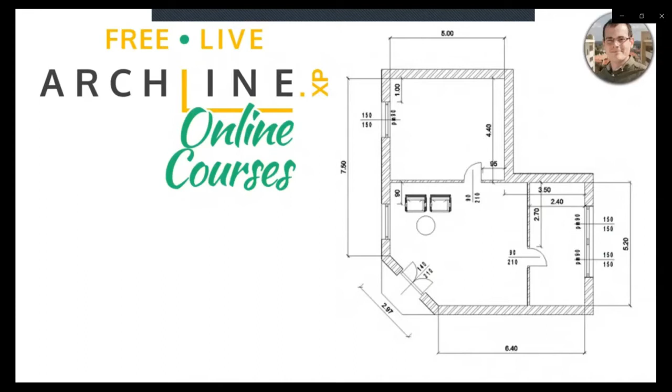Obviously, first we are going to look at the baby steps: how do we get started? I don't want to bore you with details, so we are going to build up a family house's reception room. Then we look at the basics, how to draw lines, how to make measurements. And then we look at bathroom design, tiling, quantity takeoffs, and how to use bathroom appliances.

Then comes kitchen design, which is all about making furniture pieces, paneled furniture, and also using home and kitchen appliances. Then comes quantity takeoffs, schedules, and tags, because that session is all about documentation. Eventually, we look at lighting and light sources. What makes a good rendering? What makes a good lamp? And lastly, we look at visual design and rendering, which will show you how to make good rendered images.

But everything starts in the beginning, and that's what we have today. So today we get started with a very simple living room design.

Before we get anything underway, let's talk about the software we are going to use for this course. The software is called ARCHLINE.XP, which is a family of products targeted for any kind of design work, whether architectural models or other building elements. This is the software you could be using, and it's a CAD software.

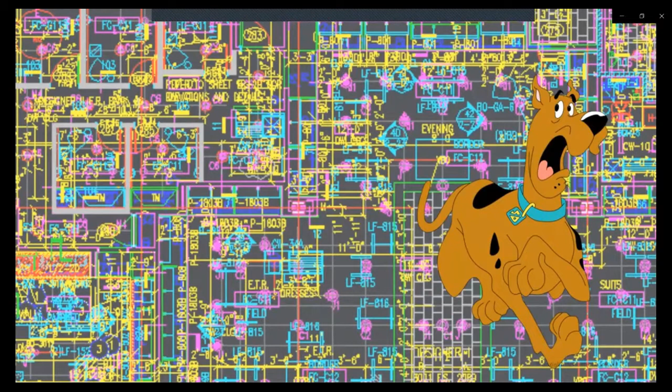Now, I always make this disclaimer because when people hear CAD software, they might react a certain way—which was actually my own approach. I was very bad with mathematics and geometry back in school, so whenever I see a CAD software with a bunch of lines, text, annotations, and command lines, I always run scared like Scooby-Doo in that famous cartoon series. Well, we are not going to look at that. We are not going to show you what's under the hood. Instead, we are going to be what I like to call creation and modeling oriented.

Think about modeling as when you are creating a clay pot or making something with your hands. You get your hands dirty for sure, but you enjoy what you do. So instead of trying to understand what makes a line or how you draw a simple group or two-dimensional polygons, we are going to look at modeling. We are not going to bore ourselves with that—instead, we'll look at how to create things.

That being said, let's get started.

If you go to our website, www.archlinexp.com, and then to the webinar series website—I'll share my screen to show you what we have here—you can see the courses planned for the next couple of days. Here you can download the webinar files and course guides. My ARCHLINE version just opened, so you can download the files and course guide from our website as well, so you can follow along with our courses.

Now let's get back to the software itself. This is what we are actually going to cover: a very simple yet effective, and I think rather nice, living room design. This is not my design per se—it was made by one of our clients, and I'm very grateful for the project she sent us.

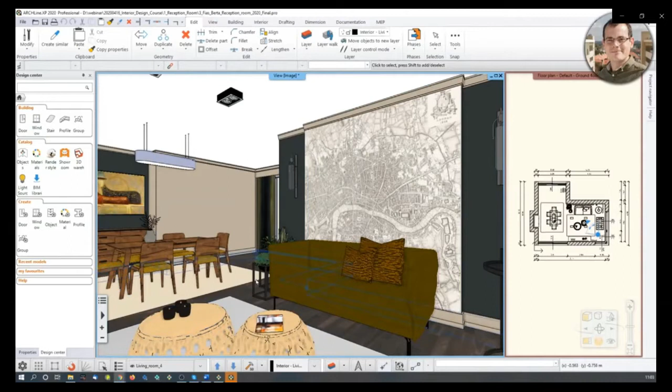What we are going to do is discuss how to make this very simple room with the furnishing pieces shown. If you have any questions, ask them along the way, and at the end I'll do my best to answer them.

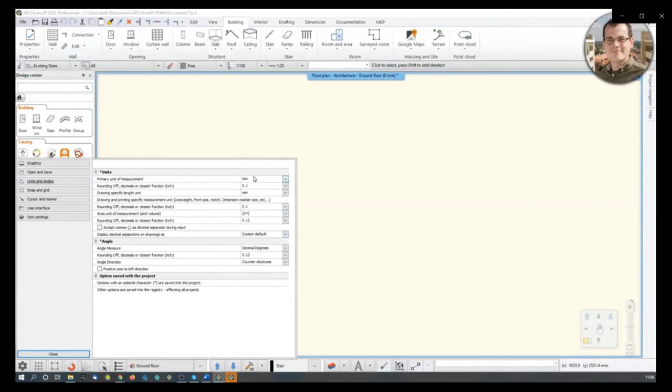So let's go back to the walls, right click, properties, and here I can define how high my walls should be and how thick they should be. And for now, I'm fine with that. So let's just hit OK.

We are working with a predefined room shape. I'm not going to sketch the room because that might be a little bit time consuming. So instead, I'm just going to pick a room shape, and I can do that with the Interior Room Maker Predefined Rooms menu. Right off the bat, I start with a rectangle, and all I have to do is type in the values.

Let's say I want to have a 7160 times 3900 millimeters room, then this is what I end up with. I'm just going to submit 7160, and 3900 is fine. Updates, hit close, and now I end up with a room.

Let's talk about navigation. There's a 2D and there's a 3D part. When you are in 2D, you can navigate by scrolling in to zoom in and scrolling out to zoom out. Pushing the scroll key and moving your mouse, you can pan around, and if you have moved quite far away, double click with the mouse scroll and the model will be fit back to screen.

If you want to work in 3D, which you can do anytime you want, you activate the 3D and activate this button right here, which magnifies the window which is in focus. Now zooming in zooms in with the scroll, zoom out with the scroll.

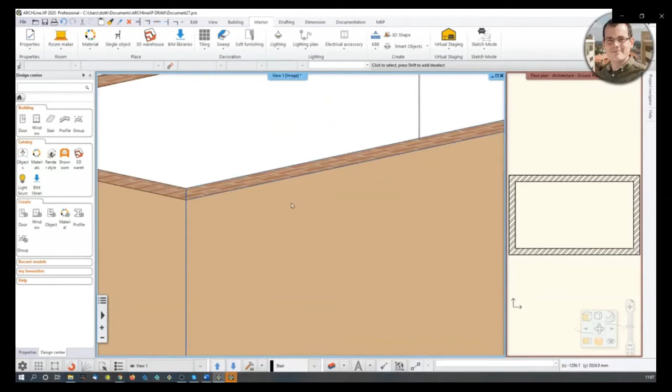If you want to rotate your model, you just push the right click on your mouse and move your mouse. If you want to orbit around your model, push the mouse wheel and the shift key, and then you can orbit like that. So this is basic navigation. If you want to pan, hold the scroll key and move your model.

Now let's go back to the 2D, activate it, because this is where we are going to do most of the work right now. There are two extra sort of extrusions from this model. There should be one bay here and another one there. So how do we create that quickly?

We go to the building, edit, and square add-on menu, and here I can add the two add-ons. There should be one here, another one there. The add-ons sizes are, I just have to look at the cheat sheet, the width, the A value should be 3000, and the B value, the depth, should be 2240.

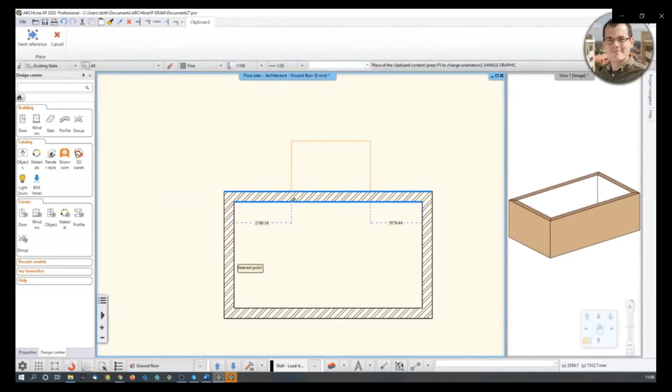By the way, if any of this is not understandable, let me know and I will explain further. So now I have a shape which I can add to my drawing, and I'm just going to snap this green dot to the edge, and there you go. So one add-on is done.

Okay, I want to add another add-on, but I don't want to go back to the menu over here and find the right tool. Instead, I'm just going to use right click, and the software will offer the last command, which is a square add-on. This is what I'm pulling up, and the add-on sizes should be, again, I go to my trusty cheat sheet, it should be 1400 for width and 500 millimeters for depth.

How do I add it properly, positioning it from the wall corner? There's a tool for that—I push the add-on to the wall, see where it says nearest point, and then type in the value 1400, and that value gets submitted. So this 1400 comes from here.

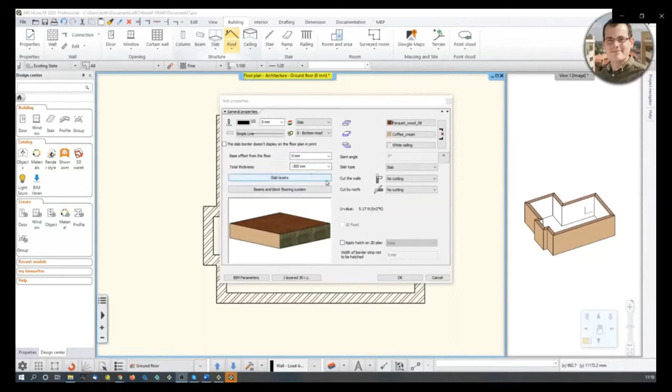I go to the building menu, slab, right click, and go to properties. This is where you define the properties of your slab. I'm fine with the covering, the thickness, and the base elevation—I'm not changing that, but if you want multi-layered or multicolored slabs, this is where you set them up. Let's just hit OK, I'm accepting this right now.

So I go to slab, slab by walls, highlight the whole drawing, hit enter, and the slab is created. You don't have to manually trace the drawing—just highlight the whole thing, hit enter, and it's created.

Same story with the ceiling. Let's investigate how that's done. I go to ceiling and plain auto ceiling, right click, properties again. I always like to fine-tune things before I use them, so I don't have to go back and edit them later—I like to do that before getting started.

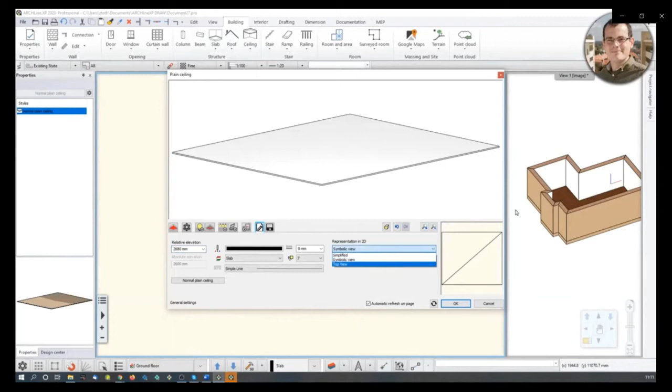Two things I have to set up are the elevation of the ceiling, which is going to be 2680 millimeters, and the representation in 2D—I don't want this slash, so I'm going with top view, and I think this is done.

Okay, the ceiling is fine-tuned, so all I have to do is go with ceiling and plain auto ceiling, and again this spider web appears, which recognizes the contour of the room. If I click, the ceiling is created.

This is a dilemma for me, because I want to model things inside the room, but I can't because there's a roof above it blocking my view. So if I scroll in, I can't see anything.

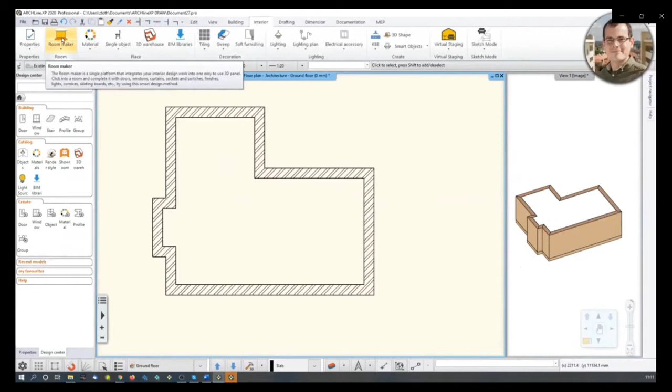For that reason, we have a very effective tool called the Room Maker. What does this do? Instead of telling you, I'm just going to show you. If I click on the Room Maker, again the spider web appears, making us think it's another ceiling, but no—if I click, the software puts me inside the room.

The usual navigation tools still work, so if I want to look around, I hold the right click and move around, zoom in and zoom out. Nothing fancy appeared here—so why should we use this?

That's because if you want to add doors and windows, you can position things much more easily. Let me demonstrate—this is the wall where I want to add a nice large sliding door. How do I do that? I'm going to use one of the tools from this palette. I'm not going to explain them right now—instead, I'll show you.

Let's start with the first one, the door library. Here you can find the door you want to use and put it onto the model. Let me find the exact dimensions of this door so I can use real world values instead of figuring them out myself, since this is a recreation of a room—I'm not going to end up with customized values.

So I hit back here, and now I'm in my door library—these are the objects you can work with. If I go to the door library and then indoors sliding, I have an array of sliding doors to work with. There's quite a few, so I don't know which one is good for me. I have a note of that, so I'm going to search in this folder and say single-sided.

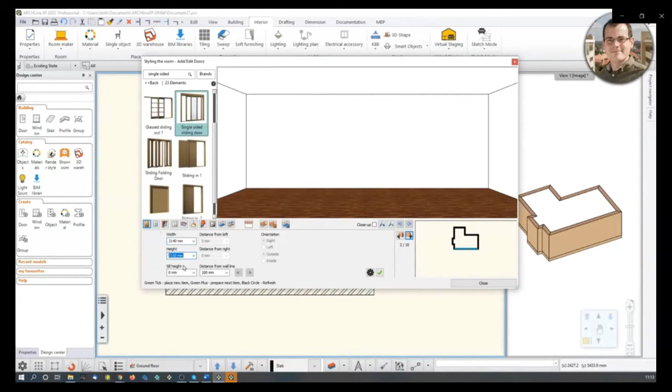And here we go, we have a single-sided sliding door. I click on it, it doesn't appear. Why is that? Because first I have to customize the width, which is going to be 3140, and the height should be 2400. Let's just hit this check mark, because that would position my door.

This is not the right position, so I want to push it towards this direction. I want it to line up with the wall corner. How do I do that? I do that by clicking on the distance from the left or right, and I'm just going to zero out distance from right, hit the refresh button, and the door nicely snaps to where it should go.

And notice this is very interesting. When you work on the room maker, whatever you do here, the 2D and the 3D updates, so you don't have to go back and manually refresh these things. These things are always in connection with your model, so you don't have to do things twice, which, when it comes to modeling, is a huge time saver.

So I'm just going to use this wall navigator to find the wall I want to work with. That's the wall I want to work with, so I'm just going to move there, just a second until I find it. I think that's wall number 9. So here I want to have a full wall-to-wall, or corner-to-corner, sliding door.

This one, again, I'm using the same model, but this time the width is going to be different. I just have to put it to 3000, and the height should be 2400. Position it, and then it appears. I don't have to this time set up the corner distance, because this magically fills up from corner to corner. So this is how you add doors.

Let's move on to windows. Story is the same with slight variations. You have to take care of one extra data, and that is the sill height.

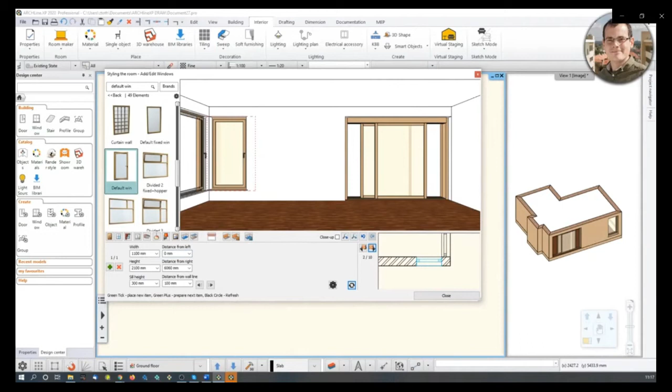So doors and windows are done. What is the next logical step? That is curtains. If I go to the curtain button, I can first define what kind of curtain type I want to use. Let's use this one. And then, by clicking on the check mark, my curtain is created. Well, good thing about the curtain is that it has dynamic sort of properties which you can fine-tune.

So you can see how many pleats you want to have, or how deep you want to draw this curtain in. I'm not satisfied with its values for now, so I'm just going to change the height to 2680, and the bottom height—this is the value I'm talking about—should be 20.

Okay, there we go. Fabric, well, this is not really good, so I'm just going to click on the paint bucket and find another material. Here in this list you can find a jump list of materials, and here I can find what I'm looking for, the curtain 002. I think this is a bit better.

Let's create another curtain next to this one. How do I do that? It's this list over here, this jump list. This navigates between the windows I have available. So I just click on the next window, again click on this icon. I haven't copied the properties, so I'm just going to do them now. I'm just going to say this is 20. And here we go. So this is how you can create another curtain above the other window. I'm just going to push this a little bit to the side, and that is what I wanted to create.

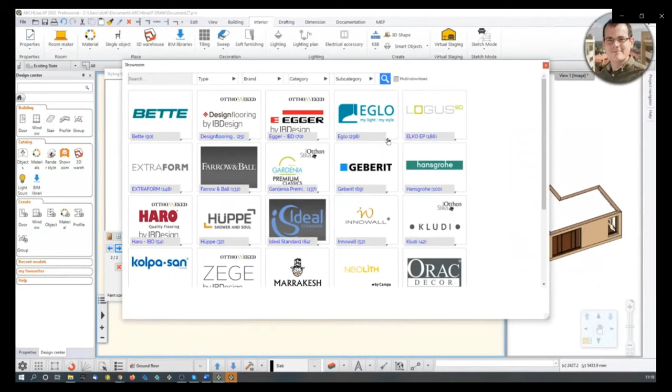Let me show you how that works. Let's say we want to have a curtain type. You can find something from this list, but if you have the name, then you can just look for that. The name is Montreal_F_105, and I'm just going to go with search, and the software tells me that this is the one I'm looking for. If I click on it, I see the manufacturer data and some other elements from this same object family. I'm just hitting download, and the software will download this object to my library.

So if I hit on it, I think my curtain has just replaced its properties, but I'm just going to move to the other curtain, and here I'm implementing this as well. So much better this way. Well, when it comes to fabrics, I'm not the guy to talk to because I usually don't see the difference in these things, but it's always my wife who comes in and fine-tunes my design when it comes to material properties and colors, but for now this one would do.

The next task is basically how to keep on coloring things, and let me just go on my cheat sheet and talk about wall colorings. Or before we do that, I think the next step would be switches and sockets. Now, what we have to do—you might have already guessed it—first we have to find the wall on which I want to work, and then I have to find the element I want to position.

Let me hit back and start with a socket. Socket outlets, very standard European socket. If you want to use the English one, we have them here as well. I don't want to put one socket, instead I want to have 3, so grouping should be 3 horizontal. And the base offset from the floor should be 300 millimeters, because sockets should be closer to the floor. If it's too high, then cables will be hanging down. We don't want that. And we are just going to position that.

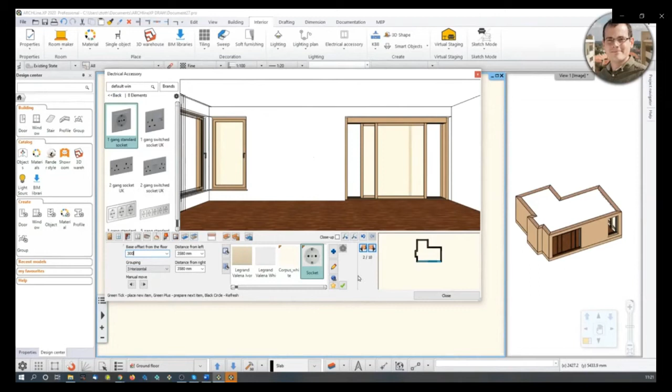And if we do that, the sockets appear. Nice. I can fine-tune where they are, but I think I'm fine with that. Next task is to position the switches, the light switches, which are to be found here. Later on we are going to have some light sources, so we need to have switches for them.

Hitting back, and I'm just going to go with the switches, plate switches—this two-way switch would be fine. Again, I need 3. And the base offset from the floor, well, since this room is not going to be inhabited by kids only, the switches should be higher. Kids should not have access to the switches and sockets anyway, so let me just crank this up. I think it should be 1200.

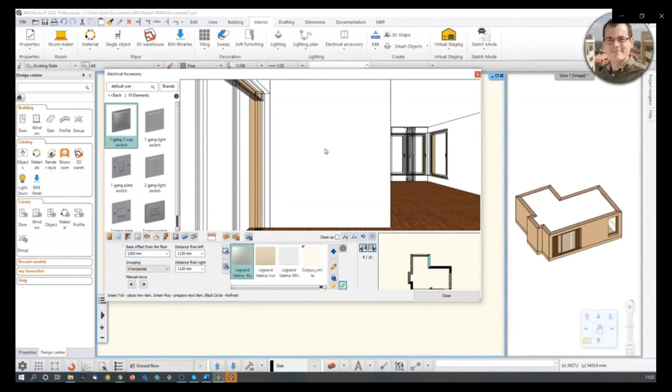And if I hit the check mark, then the switches appear. So this is how you position switches.

Let me just close down the room maker for a second, because on the 2D you can see the switches as two-dimensional symbols, which are very good because if you are later on going to create a lighting plan or electrical wiring plan, you would need these kinds of symbols. Let's go back to the room maker, which can be done by Interior, Room Maker, and click. This was just a very short side note.

Next thing, we have to add the skirting board, cornicing, or molding. I'm not sure how you call it, but these are the tools you can use for that. There are 3 positions for this kind of profiles: on the top for the ceiling, in the middle, or at the bottom for the skirting.

Now let's start with the one on the ceiling, and for that we have a profile library. I'm just going to go with PX-022, but the sizes are not good, so I have to change that. The width should be 20 millimeters and the height should be 100. And if I hit the check mark, the skirting or cornicing or crowning is created.

I'm not fond of the material, so I have to change that by going into the paint bucket and finding the one. I don't want it to be wood colored, it should be something like that. Light gray would be fine.

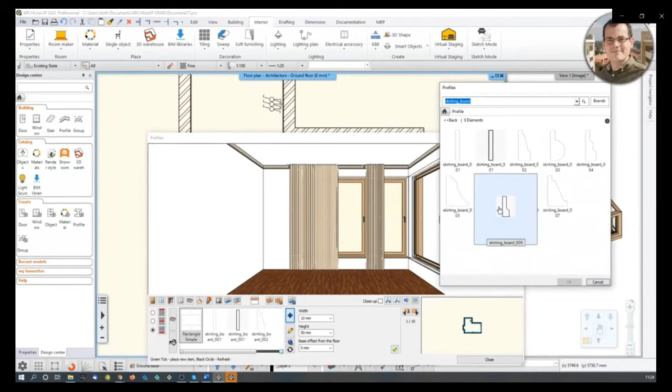The same applies for the skirting, which should be another profile. Let me just find it real quick. Which one should that be? It's not here, so how do I find it? I'm going to the blue X, the cross, and I go to the profile library and I'm looking for the profile I need. It's called skirting board number 6, I think. So I'm just going to find 4, 5, 6. That's the one. So I'm just hitting OK.

And then the width should be overridden. That should be 20 millimeters, and the height should be 150. That's fine, check mark again. I'm not fond of this material again, I never am, so I'm just going to change it to something else. So this is how you create crowning and skirting board or cornicing, whichever name you use for it.

Next task is to create the lamps. Now, what I'm doing now is something that you can do in the 2D and 3D as well. For now, we are doing it in the room maker because I want to show you how to position lamps with ease. So I'm just going to click on the lamp button.

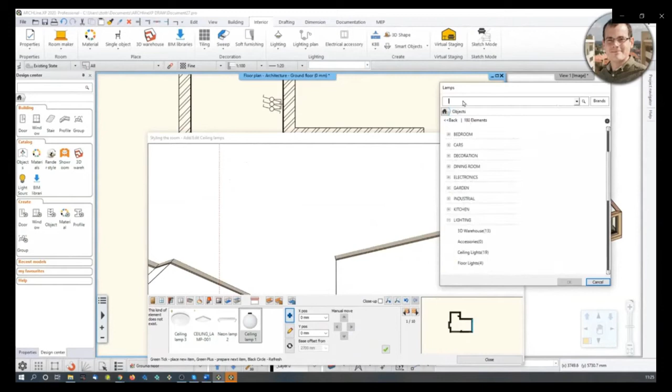First, let's find the lamp I want to use. I don't have anything in this list that I like, so I'm just going to hit the plus icon and go into my lamp library. Let's just go back to the lamps and find something. I think this Delta Light one would be good. Excuse the Hungarian naming, this is one of the objects made by a Hungarian manufacturer.

What is this light bulb icon over here? This is interesting. If any element has a light bulb icon, it means that it doesn't only look like a lamp, it's going to give out light. Hit OK and position the light source with X and Y values.

This is like coordinates. I know that the X value is minus 1800, and the base offset from the floor, I think it should be fine.

How come the light doesn't have any light, you know? Well, this is because we are working in a 3D environment. Light comes at a later stage when you're rendering things. The software would be able to show the lights and the light patterns, but that would make work a bit slower because it would be heavier on your computer. So ARCHLINE likes to spare the resources. If you don't need the light sources now to emit light, then it's going to be turned off. Later on, we can turn this on.

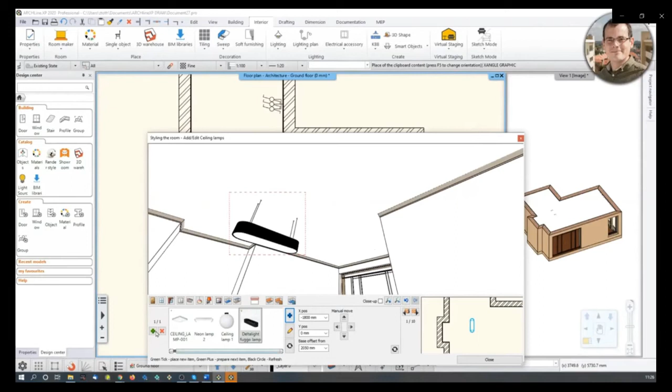But before that, we want to add another set of lights, and that's going to be a spotlight. For that, again, we hit the green icon, and the light should be a spotlight. It's not here, so I'm just going to go to lamp, and the name is Grid in 2. There we go.

X and Y position. This time it's going to be 0 and 0, and I'm just going to position it there. There's only one copy of this, so I want to have 6. How do we do that?

Well, you could do that in the room maker, but let me just show you a shortcut. This is a trick we picked up along the way. Let me quickly find the relevant part and show you how to actually make an array of lamps. This comes at a later stage in your course schedule, but I think it makes more sense to show you now, because in the software you're able to multiply things using the edit, duplicate, and matrix tool.

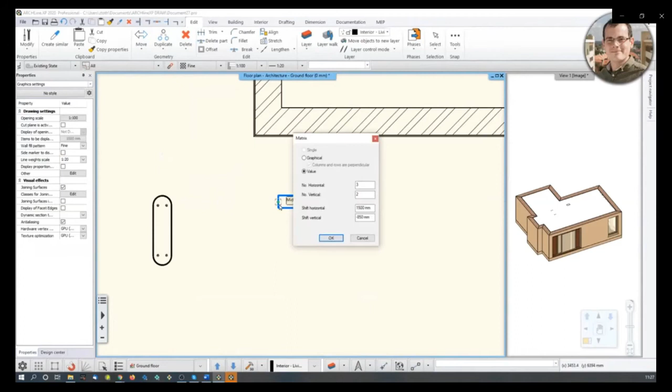Unfortunately this has nothing to do with the classic Keanu Reeves movie, but what it does is make an assortment of lamps. Just click on the element you want to copy, find the picking point, and decide how many you want. I want 3 horizontal and 2 vertical, and these values are good. With this you can define how dense you want the assortment to be. Hit OK and define where you want to position your lamps.

Click, and the lamps are created. So that's just a quick side note to show you that if you want to multiply things, you can do that. Now let me go back to the room maker and back to our course schedule, because there's a bunch of things I haven't told you before. I just wanted to have this very tiny side note.

Let's talk again about lamps, because what we haven't discussed are the wall lamps. I need one here and another one there. Again, what we do is go to the lamp menu and find the wall lamp. This one is fine, and I need to define their properties.

First, I want the distance from the left and right to be accurate. This one would be 400 from the left, and the base offset from the floor should be 1500. Hit the green button, and the lamp is created. I need to have another one, so I just click plus. Properties are the same except for the distance from the right, which would be 1000 millimeters. Okay, fine, so the wall lamps are now good.

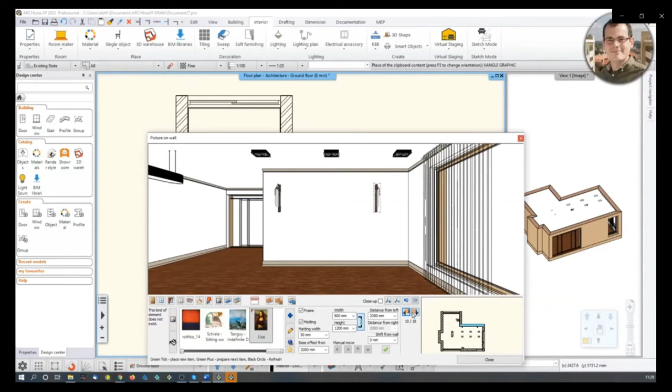Next thing, what is the next button over here? That is actually the picture on the wall icon. With this you can add decorational elements and paintings on your wall. Let me just find one of the walls which are sort of hidden.

I want to give this wall some kind of accent. So how do I do that? First we need to find the picture we want to see. I think I'm going to use this one from Arunas Zilis. One of my Lithuanian viewers might be able to correct my pronunciation. He's a very famous contemporary painter from Lithuania, creating nice, brightly colored, mainly yellowish oil paintings.

So how do I put this onto this surface? First, I want to have a frame, but matting I do not need. The base offset from the floor, is this good? I don't know, so let's just hit the check mark. No, it's too high, it's pushed into the ceiling. So the base elevation should be 1200. Let's hit the refresh button, and now we ended up with a nice painting. That's one way to do it.

Let me show you the other one. For that we have to navigate back to that big wall with the wall lamps. I think it's over there. Yeah, I want to have a nice map over here. Why a map, you ask?

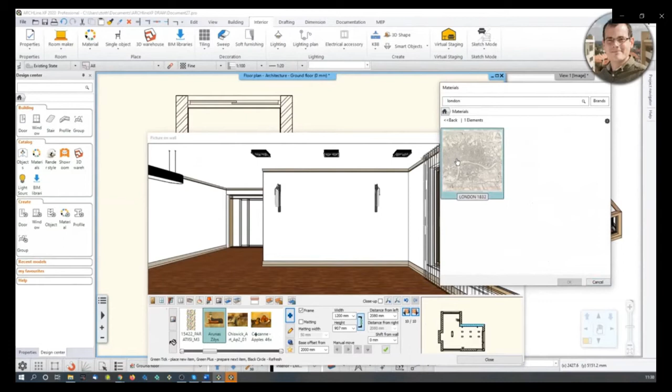Well, I like to have maps on the wall. It's especially if they are older maps, they show you a sense of tradition, showing that things happened before we came around, and people lived and prospered before we inhabited this earth. I know it's a bit sentimental thinking, but I like to see these things, the material evidences of people living in the past.

So what I do is disable the frame. I don't need that. And the width and height I have to change. The width should be 1200, and that's not the actual width. I just have to keep scrolling in my agenda, because the width is going to be 2200, and the height should be 2450.

Distance from the left, I don't want this painting to overlap with any of my lamps, so this would be 850, and the base offset from the floor should be 150. And if we hit OK, then all we have on the wall is the map of London from 1832.

Quite a nice one. It goes with the style of my skirting board and cornicing, but it's not really going with the flooring, so I need to change this ASAP, otherwise it's going to have a bad effect. By clicking on this button, I can pull up the different covering styles, but I'll just go with this oak truffle colored one. I think this goes much better with my painting.

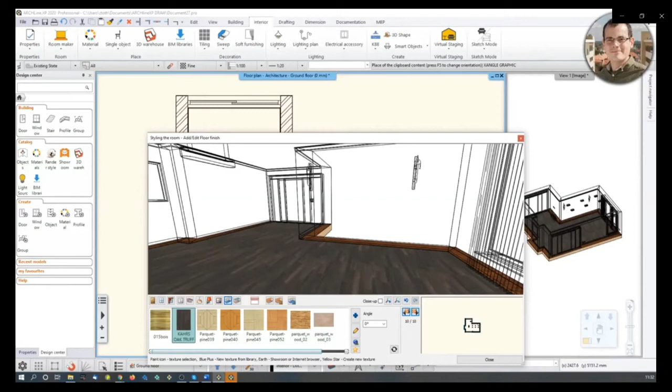This one is fine. Next thing I have to set up is the wall covering, because so far everything is whitish, and you might not want that. So let me just go to one of the walls and change its covering. Or better said, how do we change the covering for all the walls?

All I have to do is go to my material library. I don't have anything I like here, so I'm just going to hit the plus icon and look for light gray and find it. Hit OK, say all walls, click on it, and all the walls are changed.

But let me circle back. This accent wall isn't good this way, because it should have a different, darker tone so this painting would really be emphasized. So what do we do then? We go back to where we started, but this time I have to remove the check mark and go to the material library and find another texture. This should be black blue, I think. And here we go - this time only this wall changed, so that's exactly what I wanted to end up with.

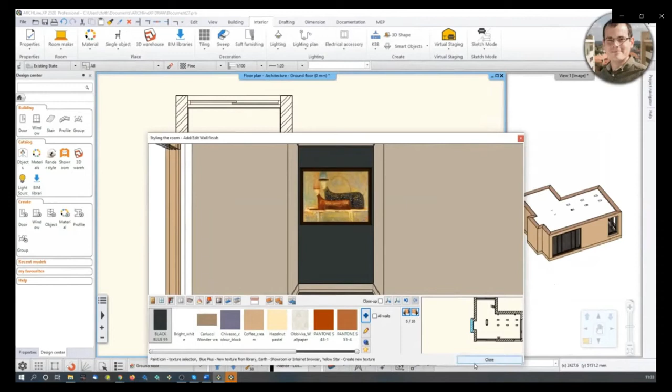I'm going to close the room maker for now. And here's the problem: how do I get into this model? Whatever I do, let me just magnify it - whatever I do, I never get inside.

So why is that? That is because we are working in a view called axonometry. Axonometry means that wherever you are, distances would never get shorter. If we would physically stand here, we would see these two lines get closer to each other with distance, but this is not the case. This is an axonometric view, which is good for planning things, but when it comes to interior design, you have to rely on something we call the perspective views.

If you click on this eye icon, the perspective view appears. First thing we have to realize is that this is where we are, this is where we look, and this is how wide we see. So if I click on this item over here, I can drag where I actually am.

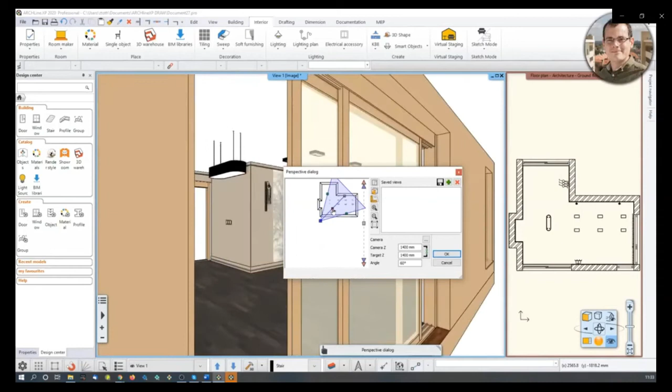Why does my floor plan look like this? This is because the representation is changed, so I have to click on this button to have a proper 2D view and not a top view. So let me just move this marker inside my room and turn my head like this. So this is what I want to see. If I'm fine with this, I click on the plus icon and then I can name my viewpoint.

Now, how should we set up these viewpoints? Well first, it's good practice to have the Z value, where we actually are, the height, to have the same height as our eye level. Mine should be 1700 - I think I'm shorter than that, but this one would be fine, because that gives you a more realistic viewpoint.

Then we have to double click and name the views. I think it should be reception room 001. And if I want to have another perspective, all I have to do is change where I am, change what I'm looking at, and hit plus again - this should be reception room 002. Okay, I think I'm fine with that.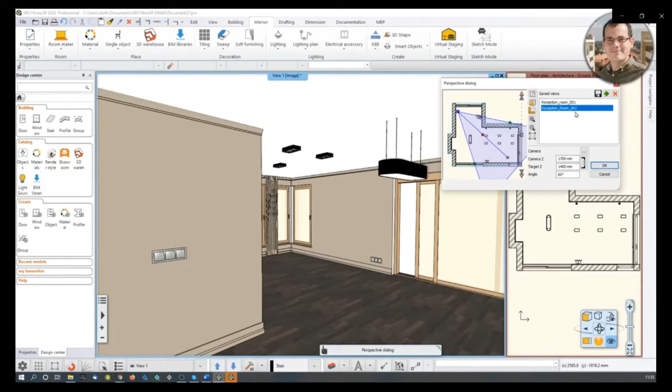I'm not going to make more of these, but it's very important that if you want to toggle between these views, you can use the up and down keys, or you can just punch the page up and page down keys, and that way your position in the room would be moved.

Important - you see this marker over here? This is where you can fine-tune where your perspective actually is. Just grab onto it and move it wherever you want, and if you like this, you can save this view as an additional one. So using perspectives is very important for creating visuals, because a rendering is never realistic in an axonometry.

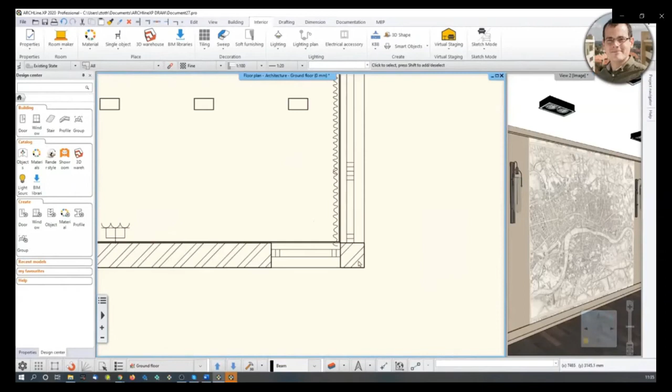Moving on, there's a couple of things we have to clean up, and one of these is the corner window. Let me just move my perspective over here. This is a mess, so this is not good. How do I make the divider, the mullion, disappear?

For that we have a tool, and that is in the building window, on wall corner, join two openings to be at the wall corner. All I have to do is select one of the windows and the other, and the connection is created, but at the same time the window would be moved. So if I move here, I see that now there's a divider. I don't need that, so I'm clicking on the window and changing its size to be original. The other window I'm not going to mess around with, but this one is fine for my purposes. So the windows are fine.

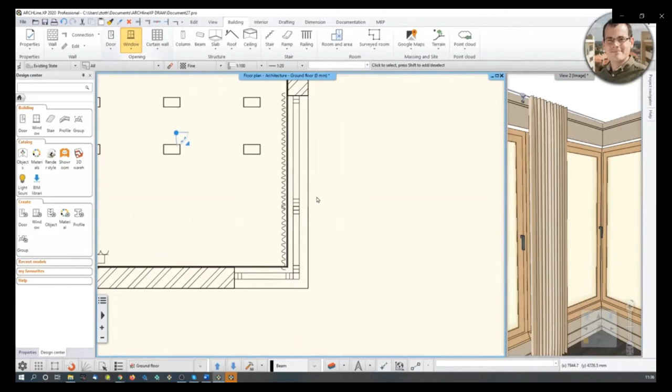I don't like the curtain here, I need to trim it back. So how do I do that? It's very important to make a note here: wherever you are creating things, in the room maker, in the 2D or 3D, it doesn't matter. Things would be editable at a later stage anytime. So if I click on this curtain, I can trim it back even though it hasn't been created in the 2D, but I can trim it back anytime in the 2D as well. This is very important to know. Later on I'm going to show you much more than that, but for now this is the important thing to know.

Okay, another thing. What if I want to change the texture of these windows? How do I do that? Do I need to go back to the room maker? Well, not exactly. I could go obviously back to the room maker, but I don't need to, because if I go to the material palette here on the left hand side, remember in the beginning I started with this part, what the interfaces mean, I just need to look for a material. This wood paldao would be fine.

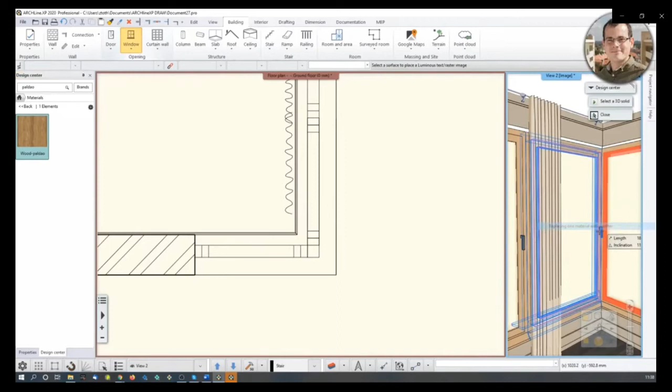Now let's talk about how we basically furnish this floor plan. This doesn't have that much going on, so let's just find a good view.

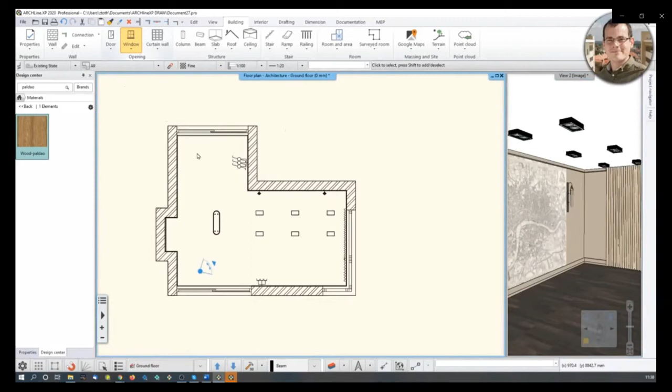Oh, by the way, if you use the page up and page down keys in the 3D, then the software navigates between the perspectives. But if you use the same keys in the 2D, it navigates between the floors. Now we only have one floor, so this makes no sense, but I just wanted you to know that if you somehow made the floor plan disappear, there are two things to know. One, hit double click, because that moves the model back to the view. But if it's still not appearing, just move the page up and page down keys, and then the model should appear. I think, yeah, here we go.

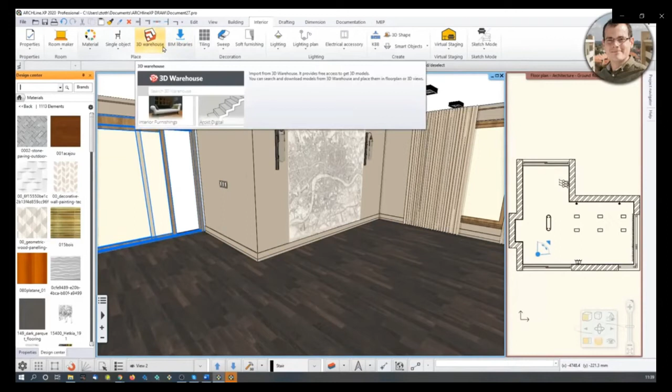Okay, so let's populate the floor plan with some objects, and for that we have several ways to do it. Just like with materials, you can either add things from our own object library, or you can reach out to external libraries such as the 3D warehouse or the BIM libraries that we have. We are going to look at them in the next course. For now, we are going to use whatever is inside the program.

Start with something we can sit on, something which is in the center point of this room. Let's look for a sofa. Husk sofa, I think Husk sofa KB, I think it doesn't have to have... yeah, it doesn't have to have dashes. So I'm grabbing the element, dragging and dropping it onto my floor plan. Okay, where do I put it? Where do I snap it? Well, for now, let's just position it.

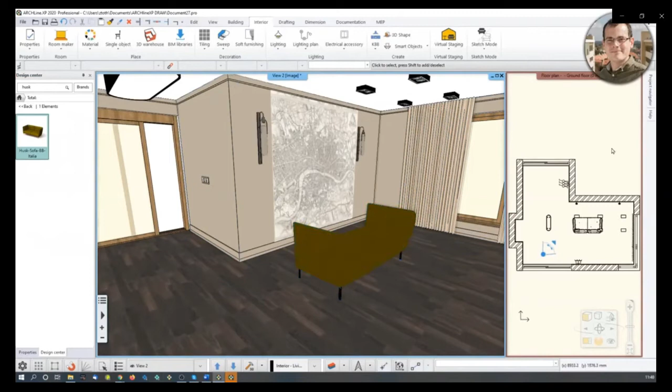There are several problems with this sofa. For now, it's facing the wall, so that's not good. So how do we amend that? We click on the 2D, magnify the window, click on the sofa, and I have two rotation markers. One of the markers, if I click on it, allows a free rotation of the element. So if you want to rotate it like this, you can do that. I don't like that, so I just want to undo this, which you can do by the undo button up here or by pushing Ctrl Z.

Another way to rotate things is to click on the element and click on the rotation marker. Rotate 180 degrees, and there we go.

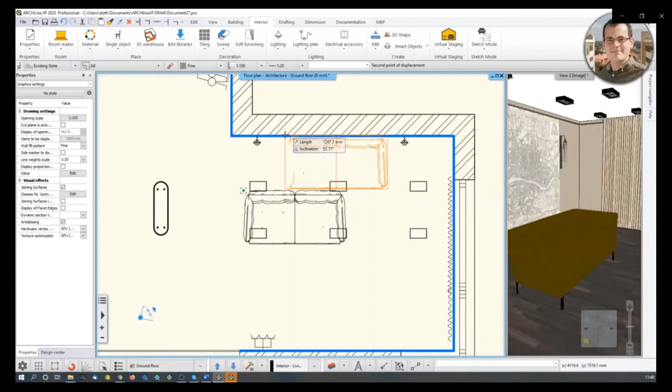I don't like where it is. I want to move it closer to the wall. How do I do that? Click on one of the edge markers and move it closer to the wall. I can snap it onto the wall, or just put it here.

Let's say I'm a cat person, which I'm not, but let's assume that I am. I want to have some kind of gap between the sofa and the wall so the cat would be able to go through. I'll hit the wall, hold Ctrl, and click the sofa. Now the software tells me there's only 2 centimeters gap between the two elements. If I click on this marker, I can say I want it to have 100 millimeters.

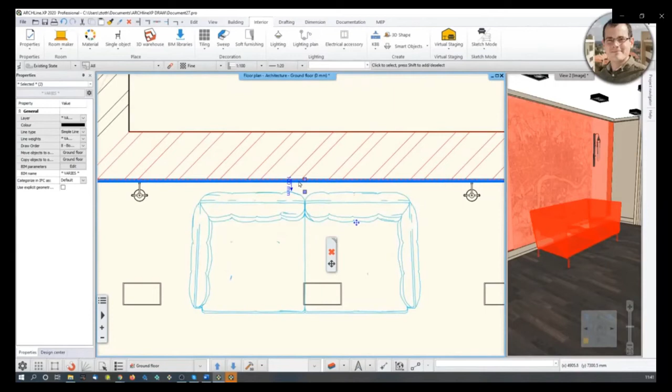So again, click on one element, click on the other one while holding the Ctrl key, and then you can control how far things are away from each other.

Now, what are we going to do in this room? We are going to watch TV from this element. So for that we need some kind of TV stand, which would be this one. Again, we drag it and drop it.

I want to snap this element to the wall, but I can't because the snapping point is in the top left corner of this element. By hitting the F5 key, or clicking on the next reference point, I can find the point which is on the bottom, and then I can snap things.

Let me move it closer. I think this isn't going to work that way, it's going to push it to the other side, so I'll just put it there. Move it a bit because it's under the window, so I think this is fine.

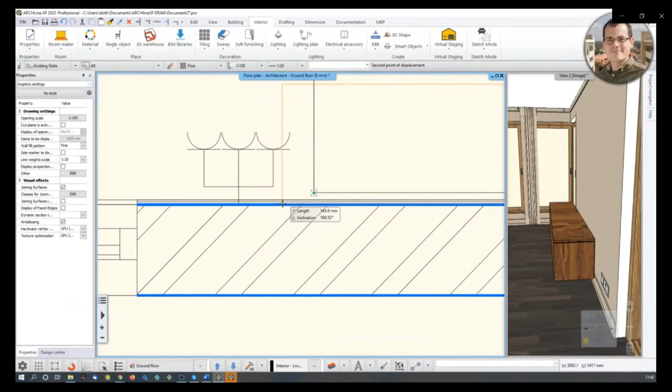And I need to have a TV on this. So how do I do that? I go to the object library, and I think I need a wall TV. I think that will be fine. Position it and put it.

Okay, there are two things not good with this model. Let me show it in 3D. One problem is that it's actually turned away from us, and I can fix that by clicking on this button and rotating it 180 degrees.

Another bigger problem is that this element is on the ground. Why is that? Because the default values of this TV are that it should snap to the ground floor, and that's not good.

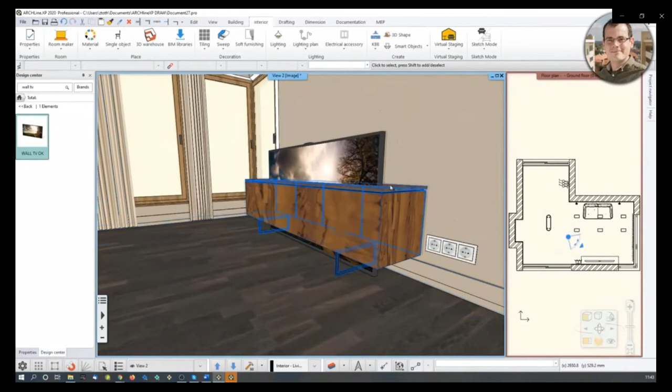So if I click on the TV, I have two choices. I can either click on this rotational marker and move it up, or go to the properties and add the base elevation. The base elevation isn't something I know, so I'll just use the marker and move it a little higher.

Again, the object is a little far away from the wall, and that's not realistic, so I'll go back to 2D, select the element, move it, and snap it to the wall. So that's how you do that.

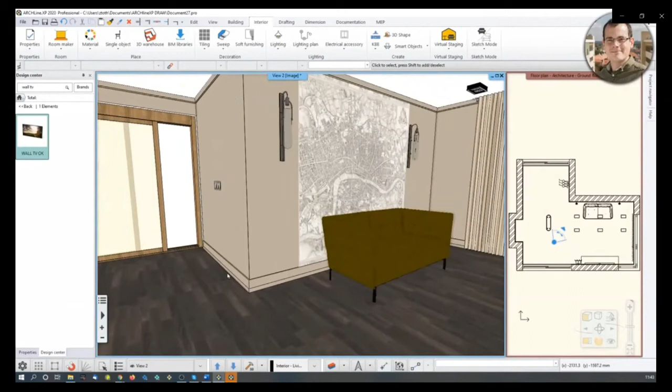Another thing I need is a bunch of footrests and a table and other things. If you don't mind, I'm not going to do that, because I have a final stage of this model for rendering. What I would have done is just add more objects, rinse and repeat, drag and drop elements, move them, rotate them, resize them if you want.

But for now we are just going to jump into another instance of this project, which is the finalized version with all the objects ready.

I'm not revealing a big secret if I say this project wasn't done by me, so it's much more elaborate than what we have time for in about 45 minutes. But in 45 minutes we managed to end up with something spectacular, and this is the end result.

Again, if you want to look around, right click and move your mouse. Let's navigate around and see my views. Page up and page down navigate between the views. This is fine. What about creating a few renderings?

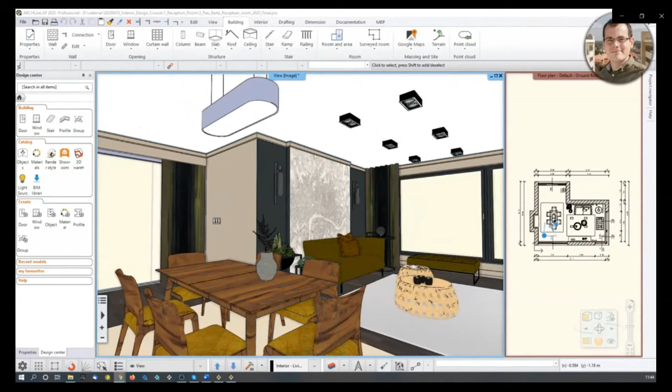How do we create one? Well, first of all, there are three things you need for a good rendering - three golden rules. One is that you should have a good perspective, because you want a realistic outcome, something believable that this is actually a real world environment. The other thing you have to set up is the material properties - I'll show you that in another course. And the third thing is the lighting and the light sources.

I'm going to talk about lamps at a later stage, but one of the light sources which is very evident that it's there is the sun. So how do we turn on the visibility of the shadows? How do we see what kind of effect the sun has on my model?

Well, first of all, we have to go to 3D activated, and here on the left you see this button which toggles the shadows on and off. Now I see that I don't see anything. Why is that? That's because the sun is in a position where it's not really lighting up my scene. So it's a good thing I didn't do a rendering, because otherwise the sun would have had no character in my design. So how do we change that?

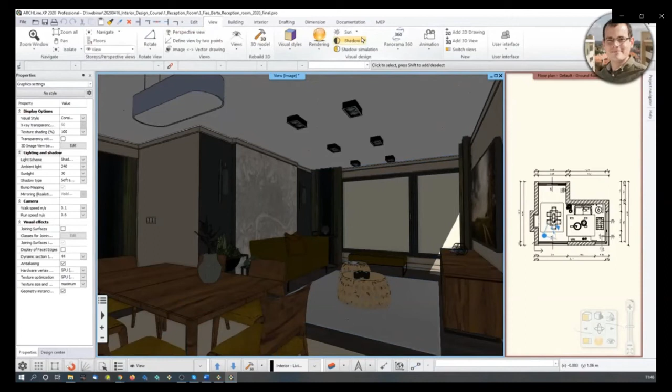Let's go to the view button, and here I have a bunch of tools targeted for shadow simulation and modeling shadows. So first let's start with sun and sun position. Here I have a predefined city list of cities where we can actually position this model.

This is going to be Budapest, where I'm actually right now, and the date should be - I think it's April 15th. Actually it's the 16th, I'm never good with dates. What's the time? It's 11:46, I think. So I'm just going to do 11:46.

North direction - well, I don't have that. Well, it's even, no, it's not worse. It's lighting up my scene from behind. I don't like this shadow. I want it to move somewhere else. How do I do that?

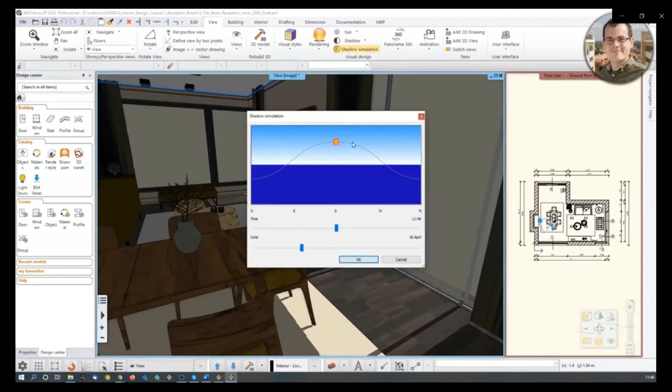I go to shadow, sorry, shadow simulation. Yeah, and here I can move my sun. I have the power over the sun, and I wanted to come up with a Latin name for the sun to sound even more professional, but I can't think of it. If you know it, please leave it in the comments.

So if you move the sun, you can change the time and the date of your scene, and find the best results. So I think this is fine - this is giving me enough sunlight to come in.

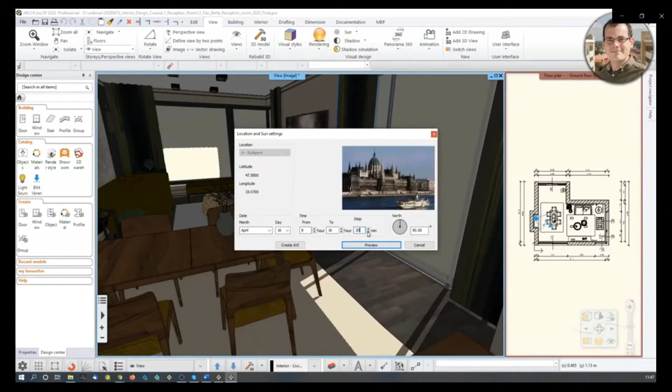What happens if I want to show the shadows in movement, because I want to pick the right date? I do that with shadow and shadow animation. This looks like the same window as before, but this time I can choose from what time until what time I want to see the shadows moving, and in what increments. I want to see every 30 minutes - preview - and now the software shows me how the sun should look. Okay, this is fine, I think.

So for now I'm going to turn off the shadows. And before we start rendering, let's talk about representation styles - something we haven't talked about before, but it's worth mentioning. If you go to 3D and click on this box, you see certain representation styles.

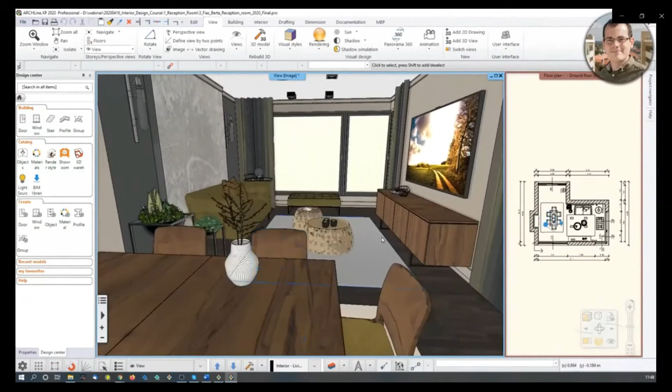Hidden line removal gives you a very cutting edge, white and clean design. That's very good for conceptual kind of work. Wireframe does the same thing, only this time you end up with a bunch of lines because you have X-ray vision now. But where it becomes interesting is this realistic setting. Now, what does realistic do? Well, it's still not a rendered image, so it's not realistic in the photorealism sense.

Instead, materials which are the same would look different on different surfaces. For example, the top of this cabinet is darker than the side, because that's how it should look in the real world. If you want a consistent color representation, everything goes back to the way it was before - this is better for deciding what is the best texture or color for that particular surface. So again, these are the representation styles. If you don't have the same one as me, just keep clicking on this until you find the one you want to work with.

I think we are done with this, but the question is, how do we make an image like that? That's what we want to achieve, and for that there's rendering.

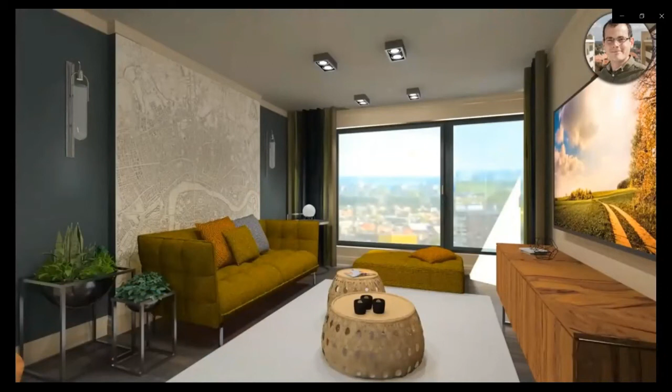Now in ARCHLINE, first you set up the right sort of perspective. That's the no-brainer one. I can fine-tune it with this kind of marker, and then let's put it to large screen and go with rendering using this orange button, or you can achieve that by the view button over there.

So when you go with rendering, there are several settings. First, you decide on the resolution and what you want to see in the background. This is going to be a panorama, and you decide how much background light you want, and whether you want an exterior or interior render. For now, we go with exterior because it's quicker.

At the beginning, we don't want to spend too much time on this. We just want one image which in a few minutes tells us how the end result should look like. Now the software loads up the rendering engine, and the model would appear in a second.

Once the model appears, there are several things you could do. You could fine-tune the quality of the rendering, or fine-tune the background images or how light it should be. But the concept is the same.

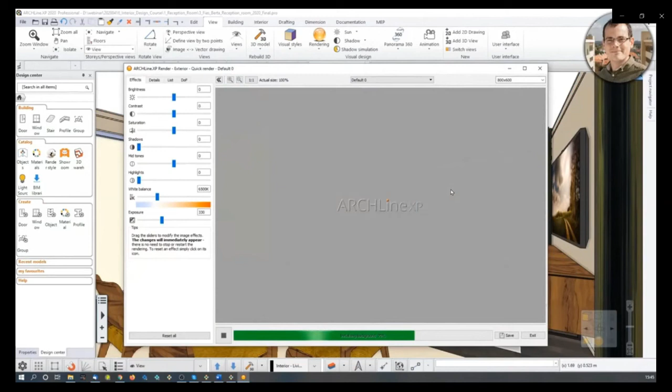What's happening now is the software starts to calculate the light and how the surfaces would react to it. You see that you end up with something barely usable, something very darkish. I don't like that. The background is not light enough and the whole thing is noisy.

But you could, even at this stage, emphasize certain elements using the exposure tool or the brightness tool. So even when the rendering is not ready yet, you can fine-tune how the end result should look like.

I want to change the background, how light that is, so I'm going to crank up the brightness a bit. But for that, I would need to restart the rendering. Not from the beginning though, just the rendering itself. The transformation of the 3D model is already done, so I don't have to do that again.

I think it's much better now. More light is coming in, so the end result is a bit better. And I'm going to go for an interior quick render, which is a higher resolution one. Again, stopping the rendering now, restarting it, and you end up with a better result right away.

Now I'm just going to fast forward a little bit. This part of the webinar is pre-recorded because I don't want you to stay and watch until this thing renders.

Rendering is by nature a time-consuming process, but this is the way you can get photorealistic results, which you can save into an image file, which we are doing right now.

Once you're done with the result, you can just hit the save button and save it into an image, a PNG or JPEG, which you can send to your clients.

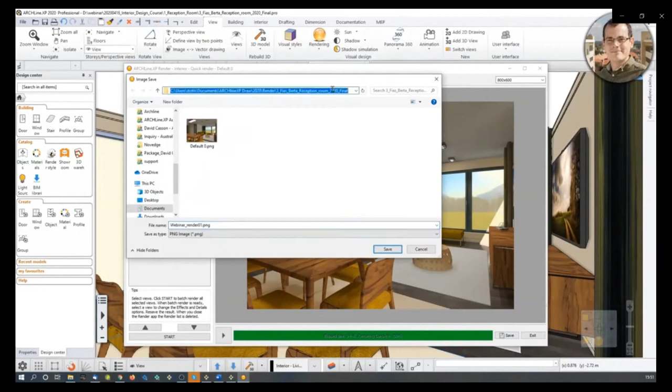Let me just do that real quick. Find my folder, and I'm going to name my image something like rendered webinar, or webinar rendering. That's right, hit save. And yeah, I need to find the right folder, otherwise it's going to go somewhere else. I'm just going to save it into the same webinar folder so I can find it later on.

You can fine-tune these things, obviously, but at this stage, this is what I want as a preliminary render. Later on, if I want to fine-tune it, I might end up with something much more interesting. It helps to crank up the resolution, of course. HD images are the industry standard, but with some work, this is what you can end up with.

So that is actually what we wanted to cover during this session, and I'm very happy to see that there are some questions being asked.

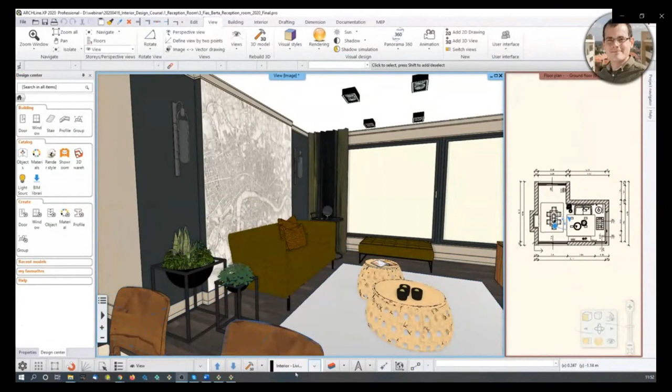Okay, there's one question right away: why are the window and door jambs not in the same color as the wall? Let's go and see. Okay, when I was coloring the walls, excuse me for just a second.

I need to have a glass of water.

So the question is, why is this white while the wall is not white at all? There's a reason for that. When I was in the Room Maker coloring things, the color for the walls was added like an extra layer of covering. If I click on the wall and go to its properties, I see that the wall material is actually bright white. So why doesn't it look white? Why is it only white here?

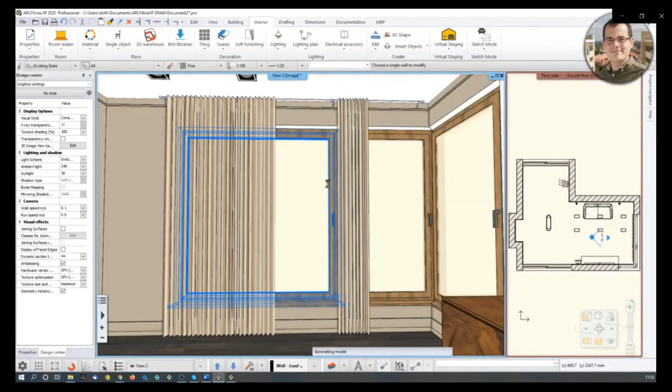That's because the wall's face has been applied to a certain color, like light gray underscore 17 or something. So even if I change this color to something else, let's say coffee cream, nothing changes except for this part, because this part is overridden with a covering, a painting.

If I right click on the wall and say delete all tiling, then it would be gone, and everything would go back to normal. So that was the answer to your question regarding wall covering. When it comes to covering things, there are two ways: you can color the original object, or you can use it as an overlay.

Let me show you another example. If I go back to the material settings and find another color, bright white for example, I want to cover this part. If I drag it and drop it, I have certain choices. If instead I add the bright white as a painting, the same result is achieved. So this was painting, and this is the object's original color.

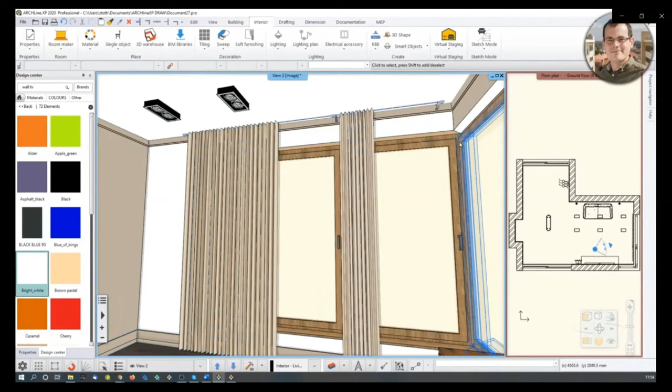So I hope that clarified the idea you had in mind.

Another question: will the Russian language of the program be added? Well, hopefully in the future. We are hoping that as we proceed, there would be a Russian version of this program as well.

Question: what material properties can you edit to make the renders look like yours? Let's talk about that real quick. I'm not going to spend too much time on it because rendering comes at a later stage, but it never hurts to get introduced to what makes a good material.

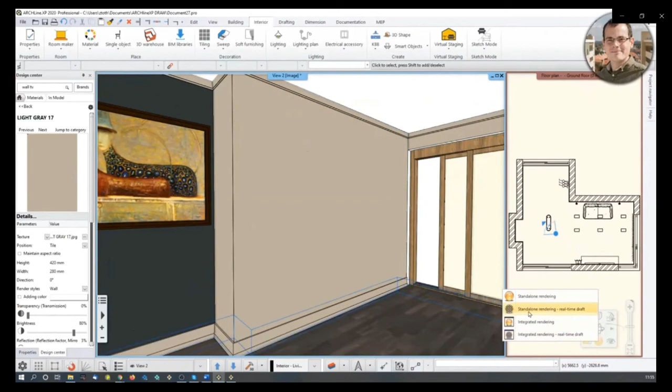So let's go with this light gray, for example, and let's open up... I can't do rendering right now because that would crash the stream, so imagine that the rendering is running. If you go to any material and click on this cogwheel icon, then go to settings, you have the material settings, and under appearance you can find what the material should look like in a rendered environment.

These are called render styles, and by choosing the right one you can say how the end result should look - whether it should be marble-ish, maybe a see-through material, maybe wood-like. It's not going to change the color of the material, instead it changes the appearance - the brightness, the scale, the bump mapping, reflection, refraction, and blurriness. This is where you can set things up.

It takes time and effort to set things up to look nice on a rendered image, but that's the legwork you have to do. We try, as you'll see later in this presentation series, to make things easier and automated, but there are things where manual work ends and art starts, if I may say so. Remember what I said in the beginning - we don't want this, we want that. So we want to sort of be artists, right?

So interior design is not only about moving in a bunch of furniture pieces, it's also about finding the right look and the right feel. Only one part of that is intuition - the rest is being able to use the software to get this result or that one. So if you want that result, you have to be able to correctly manage and manipulate the materials.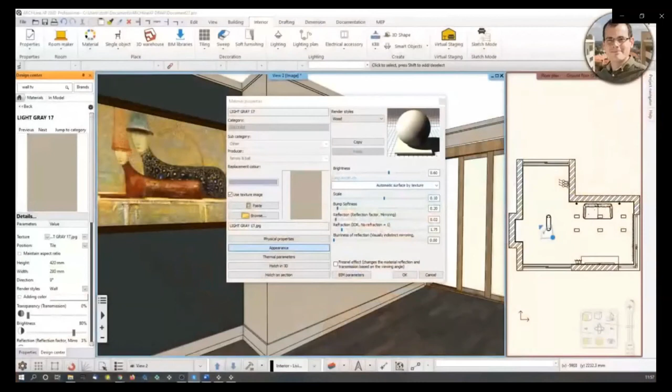I think that's all the questions, so let's talk about what happens next. Next, we are going back to the beginning. Why, you might ask? We already created something - we ended up with a room, so why should we go back to the basics, the 101?

Well, that's because we are going to, at a later stage, refer to things like lines, polylines, layers, floor structure, offsets and elevations, which should be talked about - and that's what we are going to discuss tomorrow at the same time when we talk about the basics: drawing walls, adding elements such as doors, windows, annotations, measurements, dimensions, text and objects, and how to bring in objects from external libraries.

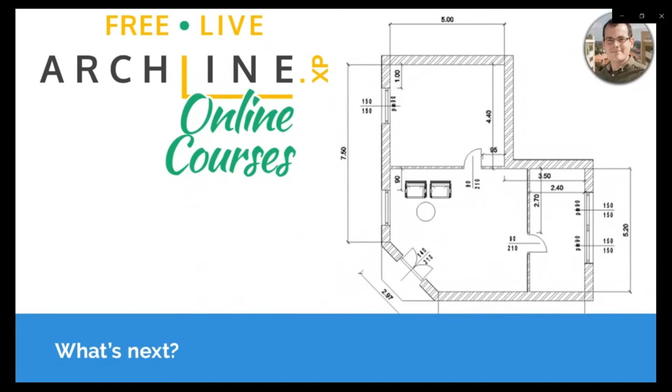Also, at a later stage, we are going to talk about import as well. So now we are working on content which is already there - I recreated something from scratch, but if you have existing elements such as PDFs, DXFs, or any kind of file directories, you can use them in the software.

And that I'm also going to show you at a later stage. So for now, that's what we wanted to discuss. Thank you very much for tagging along for this presentation on ARCHLINE.XP, and especially with a very keen eye on how to create an interior design model from scratch. If you have any questions I haven't answered, keep them coming in my email. So as you always do, just...